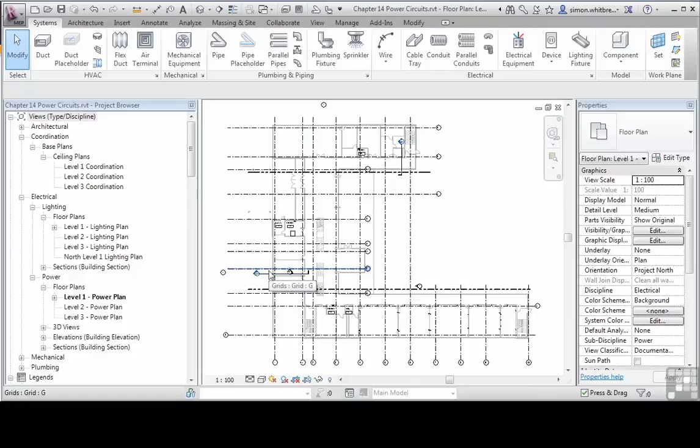From your Chapter 14 folder, open up the file Chapter 14, Power Circuits. From the project browser, scroll down and make sure that you've got Level 1 Power Plan open, and then zoom in to the south part of the building.

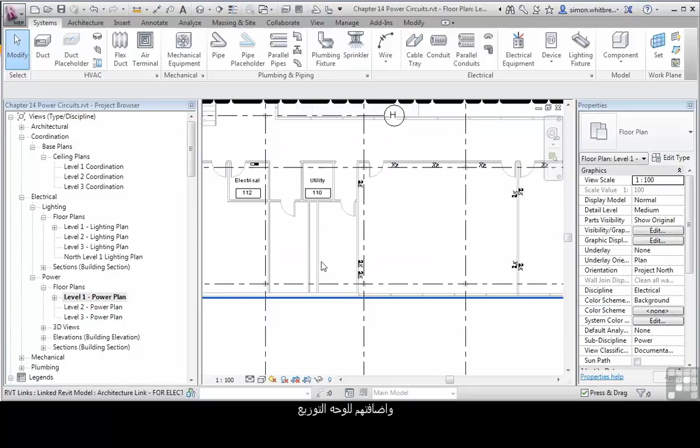Here we're going to start creating circuits and adding them to distribution boards. In previous exercises, we've seen that we can add them either individually or in groups. So let's do that for power. I'll select one socket, create a power system, I'll edit the circuit, select the other fittings that I want to be on that circuit. I can now select a panel.

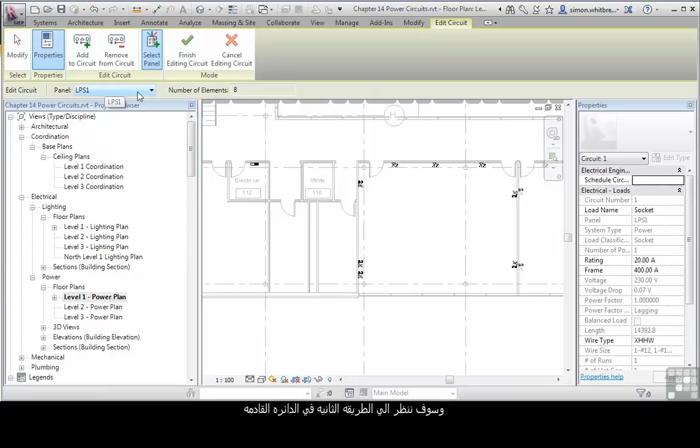I can either do this by using the Select Panel and choosing the panel, or I can select it from the options bar. We'll look at that at the next circuit we create. Here you can see that I've selected panel LPS1. Once you've finished, click on Finish Editing Circuit. Now let's do the next one.

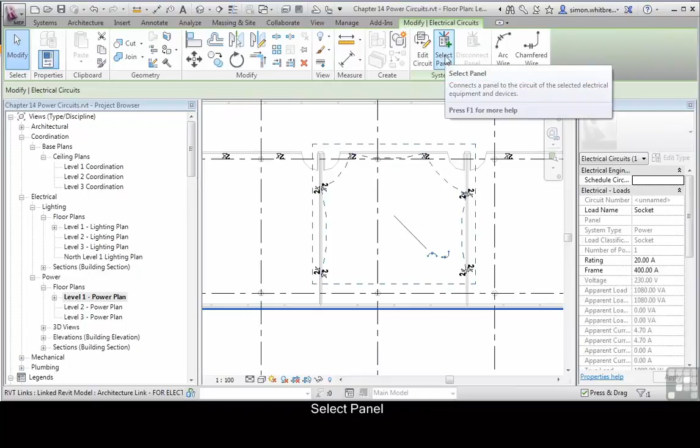This time, I'm going to select all the socket outlets in a room. I can now click on Create Power Systems, select my panel, and rather than zooming back to find the panel, I can pick it from my list. LPS1. Let's do that again. Select the sockets, create a power system, select a panel. Let's go for LPS1 again,

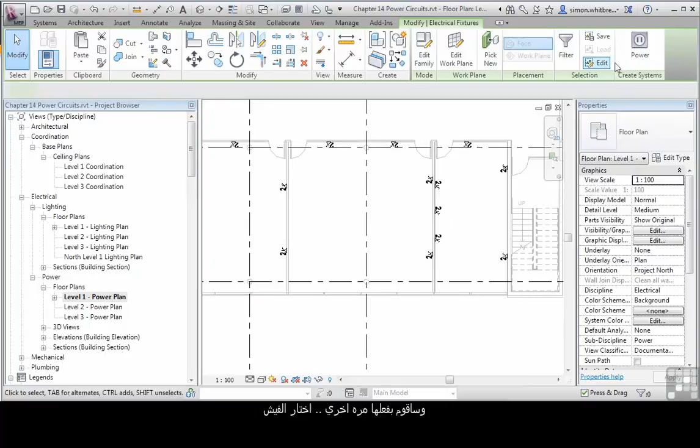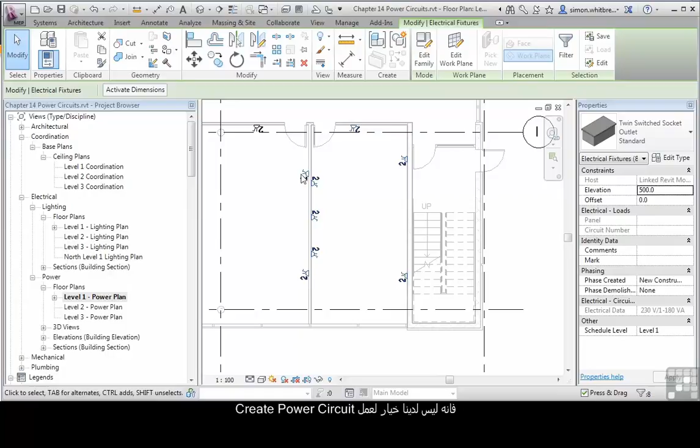and we'll do it again. Select the sockets, create a power system, select the panel, LPS1. On this last room, I'm going to make a deliberate mistake. I'm going to select some objects with two sockets that have already been placed in another circuit. Because they're already part of a circuit, we don't get the option to create a circuit.

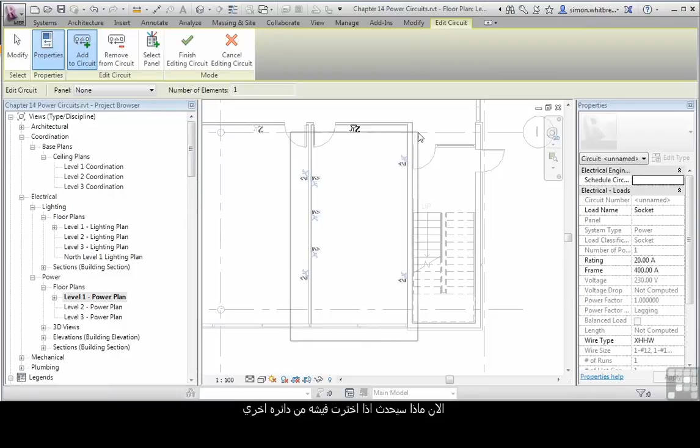So let's clear my selection set and do that again. I'll select a single socket this time, create a power system. Now I'll edit my circuit. I'm going to add to the circuit. Now watch what happens if I select other sockets from other circuits. I have selected elements that are already part of other circuits. They will be removed from the original circuits and added to this one.

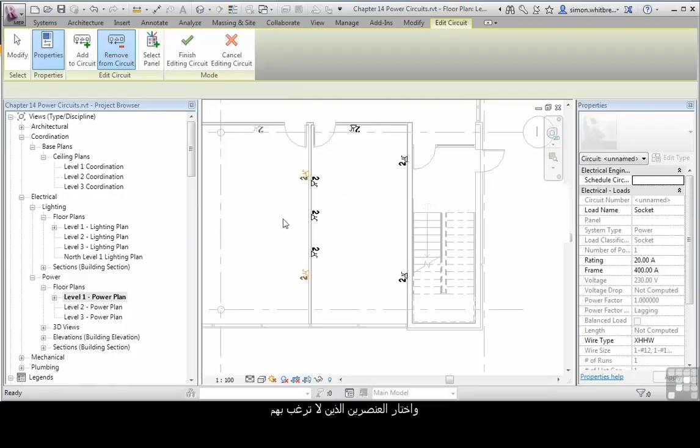And it shows me in the plan. If this was the intention, that's fine. If not, I can click on Remove Circuit and select the offending elements. Either select the panel or choose it from the Options bar drop-down and click on Finish.

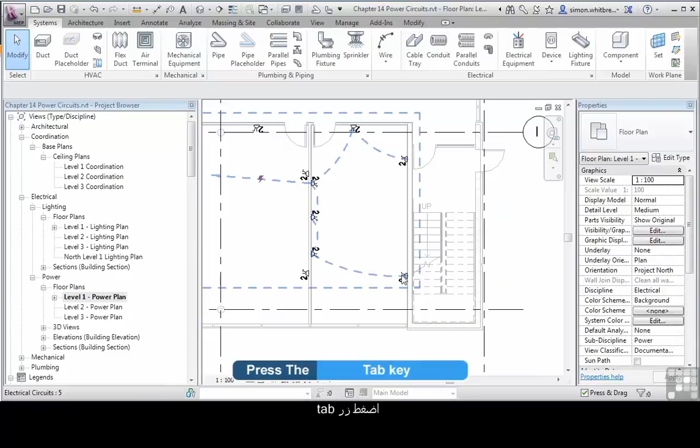Now that I have my sockets selected and placed into a circuit, I'd like to be able to show my circuit lines. If I hover over one of the sockets and press the Tab key, this shows the circuit. If I select it, I now get the chance to add arc-type wiring or chamfer-type wiring. We also get the options from the context toolbar on the ribbon.

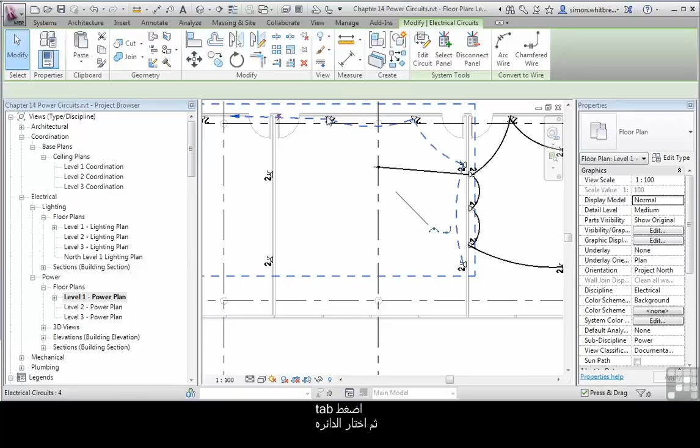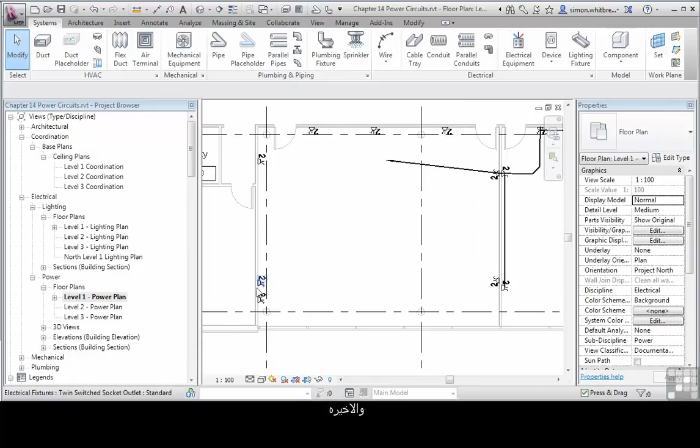I can repeat this with the other circuits. Press Tab, select, and choose the type of wiring. Hover, press Tab, select, generate wiring. Hover, press Tab, select. This time we'll try the chamfered wire. And finally the last one, hover, Tab, select, and chamfer again. With the circuits completed for power, we can now turn our attention to lighting.